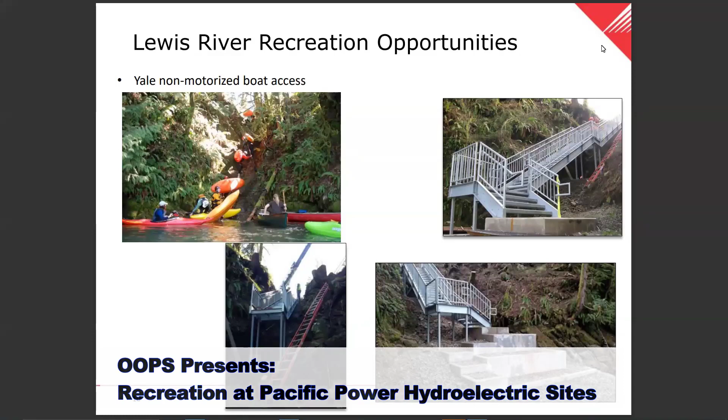One of the unique things on this staircase is that the handrail is below the top rail so that you can slide your boat either direction. So it was one of those things where I'm like, why are we doing it this way? Why do we need this? It's like, well, that's how they get the boats up. Smart and weird. Neat idea.

So yeah, that's right as you go up 503 and then turn on the other, I can't remember what road it is that goes down towards Amboy, right there by Yale Bridge, as soon as you cross over, it's on the south side. So that's a great access point to think about. And then next slide.

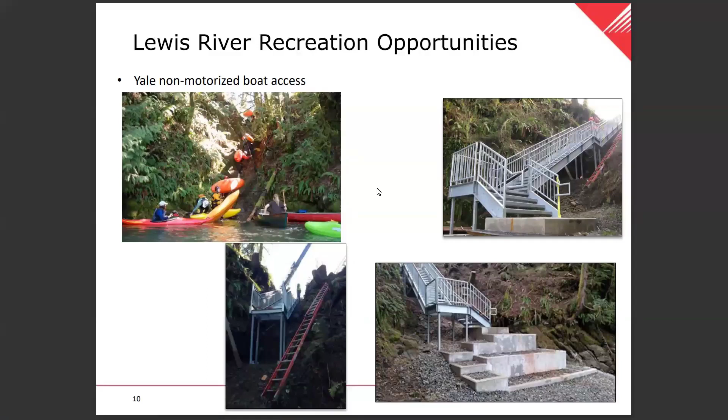Yeah, the other one, and you can access that same area by coming out of Cresap Bay campground down here, just kind of go around the corner, it's a little bit further paddle. The other is our Speelyai Bay Park. There's some area in there.

I was up kokanee fishing about a month ago, and I counted 4 open kayakers who were fishing, and they were trolling either with a little electric motor or by pedaling, and they were just out fishing this area right in here. And they actually, one of them did much better than I did. So I don't know if that helps or just the example of my poor fishing. Okay, next one.

This one is a little ways from you. This is over at our Cutler Hydroelectric project in Northeast Utah. So if you're ever out there traveling by Logan, if you're familiar with Logan, Utah, we have a very large reservoir over there. It's very shallow and there are a lot of associated wetlands with it.

And one of the things that we did working with Bridgerland Audubon and some of the other interest groups over there was to actually develop formal canoe trails through the wetlands. And so there are 3 different trails over there. I encourage you to check out Bridgerland Audubon's and just say wetland maze and it'll pop up and show you the trails there. So if you're traveling through and have an interest to go over there.

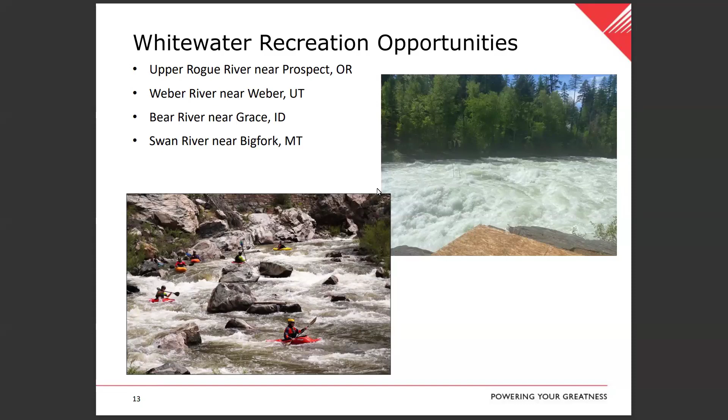Next. Okay, switching to fish and wildlife here. And this is going to be focused on the Lewis River. You saw this project before. So when Merwin Dam went in in the 1930s, that blocked all fish passage to the upper basin, blocked over 100 miles of habitat for salmon and steelhead.

And so at the time, they tried to kind of put a trap where they collect some salmon and put them over the dam, but there was really no way for those salmon to get out. So in the end, that was kind of a little bit of a failure, and I think it was just because technology wasn't there. And so we built fish hatcheries. So we've been operating fish hatcheries.

Well, when we recently went through our licensing back around 2004, there was a large interest to get fish passage to that upper basin. And so we agreed to do that. And so I'm just going to kind of show you how we do that right now. These are the species of interest. These are all listed under the Endangered Species Act.

For those of you who aren't familiar with bull trout, that's a resident fish. Pretty much stays in the reservoir. They will become anadromous every once in a while and go out. We sometimes see them go out as small smolts. We have yet to get any of them coming back, trying to get back up the river.

So we monitor that population, really focusing on establishing wild runs upstream of the project. That's our goal. Self-sustaining, naturally producing, harvestable fish. And we're making some good progress there. Next slide.

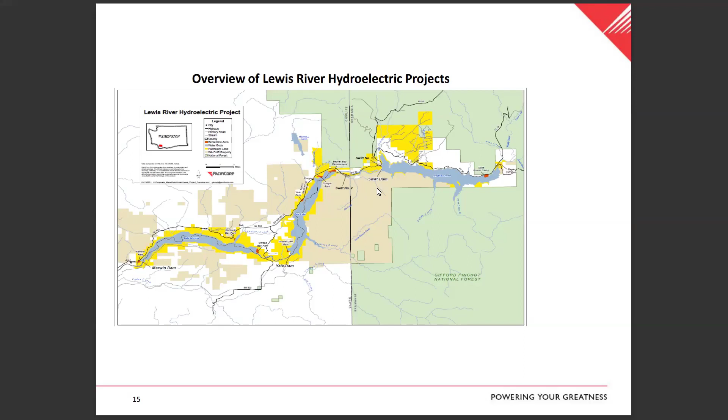So by opening up Merwin, I think we opened up about 6 miles of habitat and 18 miles of habitat with Yale. Okay, next slide.

So this is a picture of Merwin Dam and our fish facility, and I'll kind of talk you through how this works. So when fish come in, they can come all the way up to here. We have a little fish entrance over here and that goes into the trap. The fish swim in and they're elevated up to here with an elevator that runs every 15 minutes. They go down what I call the slip and slide over here into this big swimming pool where every morning my fish team shows up and we put them to sleep and we say, it's a hatchery fish.

It goes in this tank and goes to the hatchery, or this is a native fish, it goes upstream, or we do a lot of monitoring and evaluation. So we radio tag fish to see where they go in the upper watershed, how far they go. Are they dispersing or are they only using one area? There's all sorts of things like that we do. That facility operates year round.

Yes, sir. How do you separate the hatchery fish from the native fish? So almost all hatchery salmon have a little fin on their back called an adipose fin, and it's clipped off. So humans are sorting this? Yeah. So the biologists come in every morning, and they'll put them to sleep, and they come across the table, and they'll look at it, and they'll go, spring chinook hatchery female, and they'll go down a chute, and so we start to separate them.

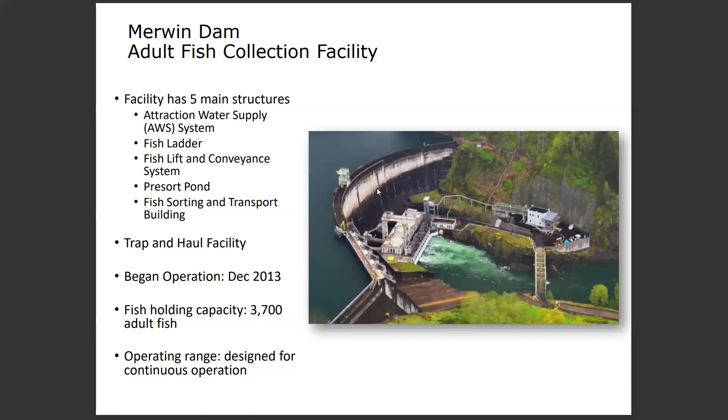All right, so that is our upstream facility where we're collecting and taking salmon upstream right now. Next slide. So those fish go upstream, they spawn, they have juveniles that come back out. Those juveniles want to get to the ocean. They have 3 big reservoirs that they've got to get through. How do you get them past that reservoir?

And so we've built this thing out here called a floating surface collector. Now, if you're a juvenile salmon and you're trying to get out to the ocean, you can't swim very well by yourself, so you're always going with the flow, right? And so you're kind of just going with the ride down the river. They hit the reservoir, there's no real flow, so they start swimming around. So what we're doing with this facility is it has a whole bunch of pumps on it, and we're pumping water trying to mimic an outflow of the lake.

Okay, so they come down, they hit the net, they kind of swim over by that entrance, and all of a sudden they're like, oh, there's some flow, I'm gonna go check this out. So they start to check it out, and then next thing they know it, the river inside here is going too fast, and they can't get out, and then they end up in a tank. And then we lift the tank up, put them on a truck, take them all the way down to Woodland, Washington, and let them go down there. So they get a ride upstream and a ride downstream.

And this facility operates pretty much year round. It can go up and down with the reservoir even during flood control. The only time we turn it off is basically for maintenance in July and August. Water quality gets really warm and we get like 5 fish a day. And it's like, no, this is very expensive to run. It was very expensive to build. And it's not good for the fish to be up there in that. They all go elsewhere, so we turn it off and do our maintenance.

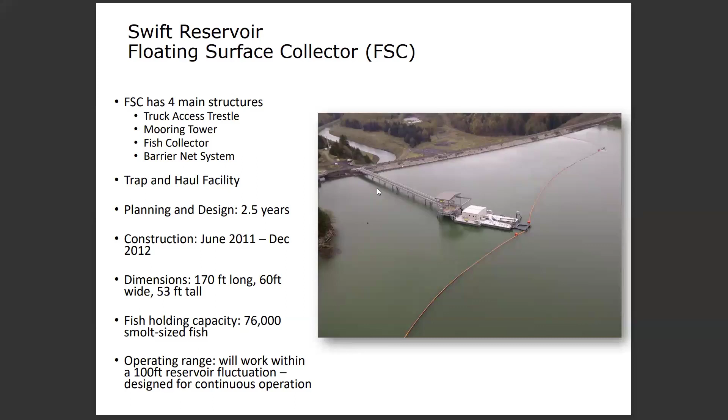Just real quick, our wildlife program. Love this program. I mentioned the bright yellow, about 15,000 acres. Almost all of that is managed for wildlife. We have a lot of elk up there. One of the neat things is that we recently, up above Swift, purchased about 4,000 acres. Unfortunately, it was timberlands, and you get really good deals on clear cuts, which allowed us, fortunately, to buy a lot of land up there, but it also gave us a blank canvas.

And so our wildlife team is able to go up there, do a little bit more, clean up the clear cut, not plant as a monoculture, right? To do different pockets of different types of trees. But one of the things up there is that over the years, the forest doesn't provide the forage and nutrient value to elk and other big game that it once did. Okay, and so we are actively putting in meadows so that the elk have places to go.

And so what's happening now is that we see a lot of elk, and this lower picture is a good one, that are coming into our meadows. All of this land, unless it's very close to our operations, is open for hunting. And so we now have a lot of people hunting on our lands because it's better hunting. Just because the elk are down there because the habitat's better. There's more nutrients.

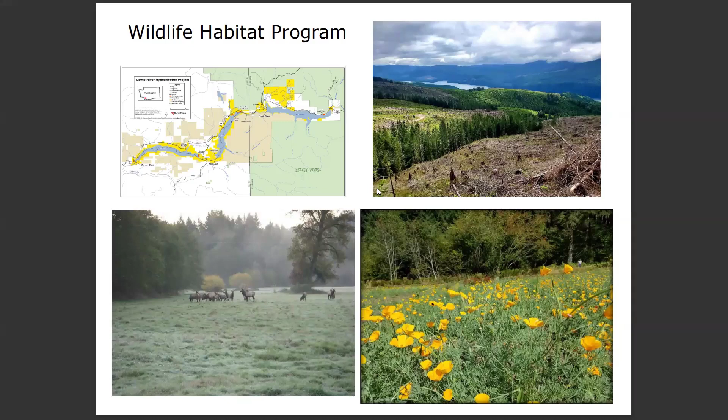They tried to put fish passage on it, a fish ladder, built it out of wood. It washed out the first year. Tried it again, washed out. They just couldn't get a fish ladder to go there. And so ended up doing mitigation through hatchery. So the habitat upstream of Condit was blocked, much as it was on the Lewis.

And so when we went in to get a new license to operate this project, one of the things that the federal government said was, you need to provide fish passage. And so we said, okay, let's look at a trap and haul system like we have up on the Lewis. And they said, in this case, no, you have to build a fish ladder. And you have to put in screens to bypass those fish. You can't do a trap. And after years of arguing, they have the authority to tell us that we have to do that.

And so we costed out what it would take to build a fish ladder that was essentially half a mile long along a steep canyon. If you've ever been on the White Salmon and rafted it, you know how that is down through there. And then to put in a screen, that was gonna cost 80, $90 million to do that. Okay, this is a project that only produces 14 megawatts. On average, across the year it produces 7 megawatts, which is essentially 2 windmills nowadays with the new technology, right?

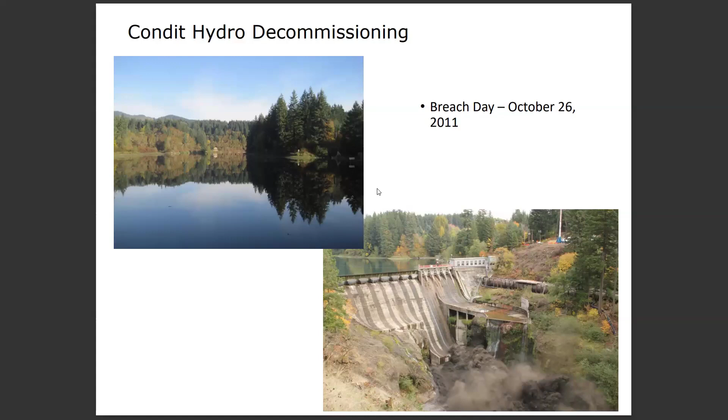A lot of that sediment sloughed off and went down through the 3 miles of lower river and landed in the Columbia. And so now you have a new delta off the White Salmon in the Columbia. One of the concerns down there was the shipping channel. You have all the barges going through, and it went right up to the shipping channel and essentially stopped. We had made the commitment that if it reached a certain depth of the shipping channel, we were going to have to go out and dredge it, but it never did. And so it's been monitored.

That is just sitting there. Every time the Columbia gets a high flow, the top layer peels off a little bit, but it's going to be there. The kiteboarders love it because now they come flying across and if they jump off the board, they're like this deep in water, so they have a little beachy, shallow area over there. That's what it looks like. Obviously, you don't want to leave it like that. So let's go to the next slide.

But first you have to take out the dam. So what we did was we had a contractor, J.R. Merritt, someone we were talking about, working with a local logging company and some other local folks just working on busting this thing apart. And so basically, they had huge hammers, just sit there and bust all day, bang, bang, bang, to break it down into rubble and then put it on dump trucks and haul it to the disposal site.

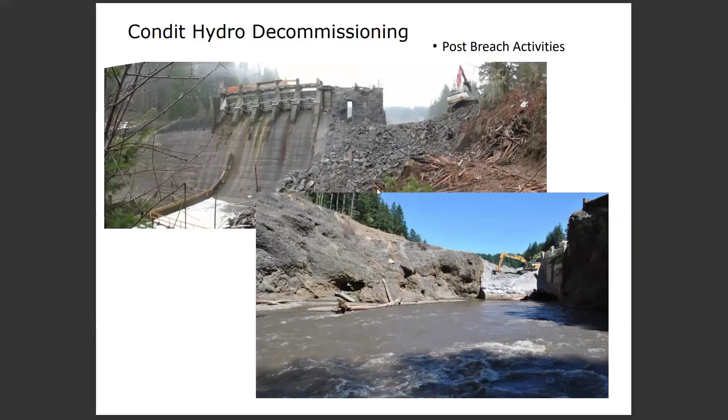We took the flow line down. Unfortunately, the flow line was all treated timber, so that had to be taken to landfill and couldn't be salvaged. We took all the stuff out of the powerhouse, the transformers and all the moving equipment, and basically mothballed the powerhouse down there. The building's still there, but it took them a year to basically get this down to where it is there. You can see the river going through here. Next slide. So this is what it looks like, I'm upstream now of the project, looking downstream.

And you go up there today and you look at that overlook, and unless you knew where the dam was, everything is growing back and you can't really even tell it's there. I've had the chance to float through there, a lot of the gravel, you're just getting back to form and function of that river, which is pretty neat to see.

From a fish standpoint, you've seen these fish spread out into areas above that, but you're not seeing increased population size. I'm not sure why that hasn't occurred yet, because you've opened up more habitat, but the numbers of fish returning seem to be somewhat stable. However, they've moved around and have better opportunity, I think. So it'll be interesting to see how that all goes.

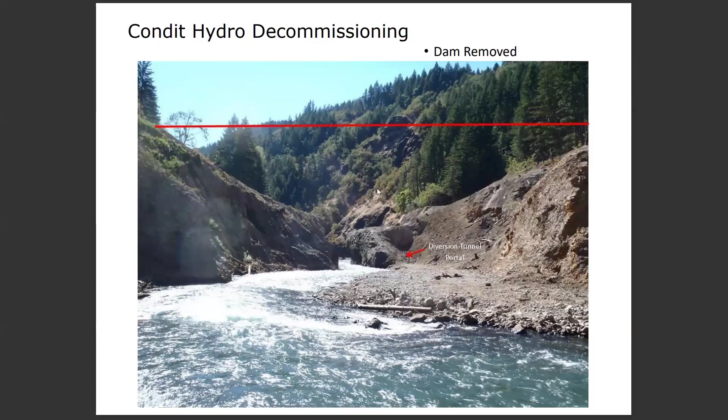Are the cabins still there? Most of the cabins are still there. So it was interesting. I had a lot of interaction with cabins. And at one point, a couple of them came up and said, okay, look, we understand this is gonna happen. Just don't leave us a mess. And it's like, okay, I appreciate that. And we're not gonna leave you a mess. In fact, we have an obligation to not leave you a mess. So the next slide. We have to restore the area.

And then it was all about public safety. If we can peel the slope back so no one walks up and the whole thing caves and goes in, you don't want that. So that was top priority. And then you didn't want to have erosive events when you have a heavy rain, right? This was like tearing off a Band-Aid, right? Let's do it all at once. Let's muck everything up, make a mess for 2 years, and then be done with it. And that's what we did, right? As opposed to, let's do a little bit and wait, let's do a little bit and wait.

And kind of interesting, if you followed the removal up on the Elwha, up on the Olympic Peninsula, that's how they chose to do it. It was a slow process. And then look at this where it was like rip the Band-Aid off. Got to the same spot, but this, I think, allowed the environment to just kind of restore on its own. We jump-started everything.

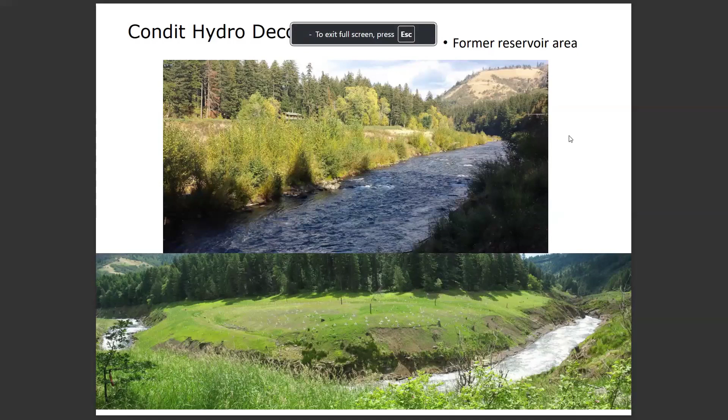This photo, the lower one, was taken like the first year. It doesn't look like that at all now. I was out there last fall. There's pine trees that are 15 foot high. That riparian area of willows, cottonwoods, it's just doing fabulous. So pretty neat to see how, just let it go, it'll do it.

And so back to the cabin owners. Some of them now, instead of docks, they had decks. Some of them kept, some of them didn't. A number of folks were like, they don't like it here anymore, and they sold out and moved on.

I gave a talk right before COVID, like in 2019 or something, back up there. They asked me to come up and talk a little bit to the local community. And I asked the question, how many of you were around when this happened? And only half the people raised their hand. A lot of people moved in. Of the people that lived there when this happened, I would say there's only about 40% of them that are still there. So there's been a pretty good turnover.

There were some cabins that were deemed unsafe because of the way the slope was. And so I think we bought out 3 cabins and had those demolished and removed. And then there was at least 2 or 3 other cabins where we went in and did quite a bit of foundation work to support them.

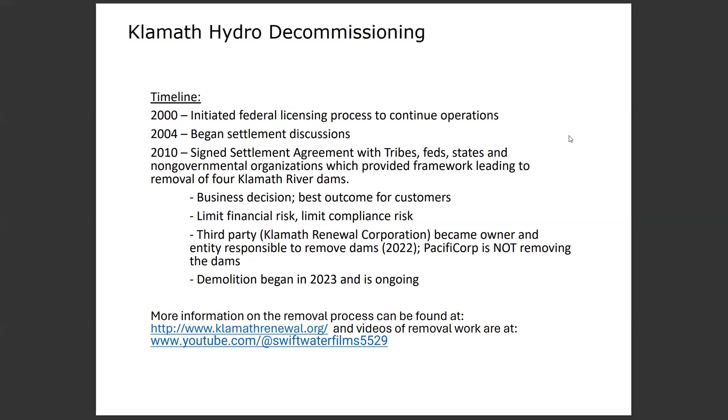So demolition began last year, is ongoing. If you have an interest, go look at the website. There's a lot of stuff on there, a lot of history and things like that. So the next few slides are just a couple of pictures that the Renewal Corporation showed. So this is J.C. Boyle. This is up in Oregon.

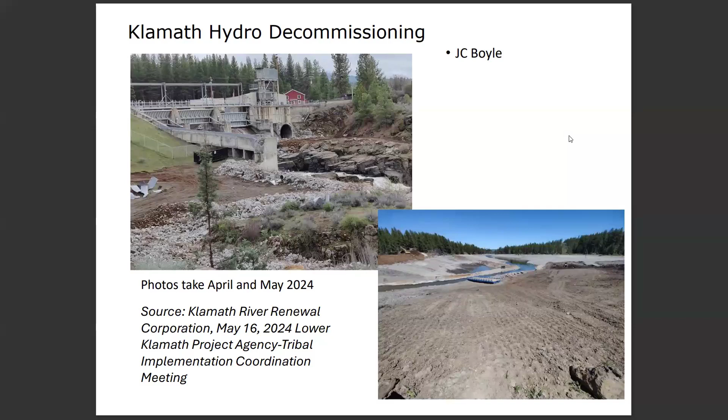It was a smaller dam, but it took advantage of a really steep drop, and that was an 80 megawatt project. That's being removed. So you can see here, they've started taking out the fish ladder. This was the flow line that went to the powerhouse. That's been taken out. The reservoir's been dewatered. They're already starting to resculpt the reservoir area. So that one's underway. Next one.

This is Copco 2. No, I'm sorry, this is Copco 1. This was much like Condit. This is much like Merwin Dam, kind of that big arch concrete in a canyon. And same way they did at Condit, just going out, beating on it, beat it to rubble and haul it off is essentially what they're doing. So that started, these photos are from earlier this month. You can see they're also starting to take the powerhouse apart.

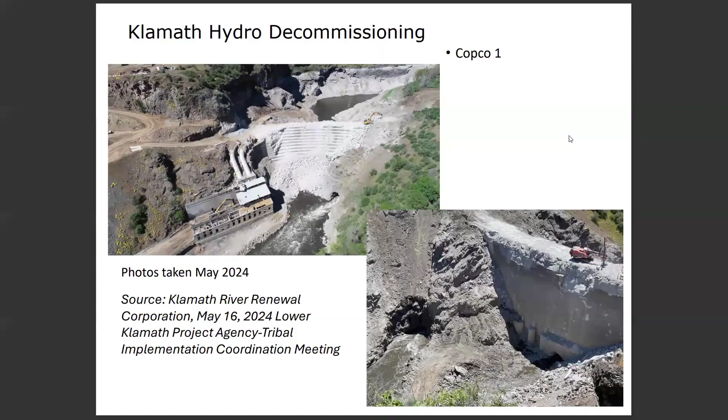Next slide. This is Iron Gate, it's kind of like Swift Dam, a big earthen dam. The top photo is before decommissioning. And then these two lower ones, you can see they're basically using an excavator, picking up the dam, putting it in dump trucks, hauling it off to the disposal site. And then that's what the reservoir looks like with the breach of that dam. That's the Klamath River flowing through it. You can see some of the grass seed and others starting to take place.

So it'll be interesting to see. Is that the same little mound on the bottom right as in the top picture? That mound in the background? Is that the same? Yes. Same one? Yeah, so that and that are the same. So that gives you kind of the view back, right? So this photo is probably not right on the dam, but kind of down in that area like that. So, yeah.

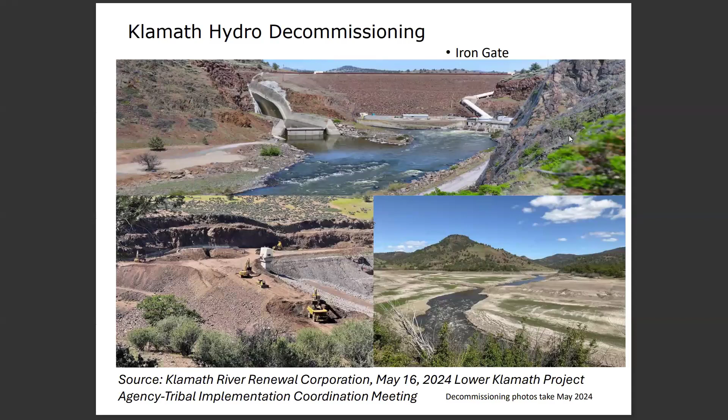Okay, we'll do the question. So back to your point, are we looking at new dams? We are not looking at new dams in the traditional sense like these right here, which dam a river and provide a reservoir or dam a river and divert flows into hydroelectric. What we are looking at is what we call open loop pump storage. And that is putting in another reservoir associated with the current reservoir, right? So you already have these big reservoirs in place. So let's build a new reservoir up here on the hillside.

And when we have surplus energy, all this solar coming out of California, let's pump water up, hold it, and then when there's a demand, you can release that water back into the reservoir. So a dam, yeah, you're gonna have to build a dam, you're gonna have to build a reservoir, right? And each project's gonna be different depending on the geology. Ideally you wanna find a spot where, hey, I can just build this little dam, there's already 3/4 of it built because of the natural topography. We're looking at those. To build a pump storage, it's a long lead time, right? You're talking 10 years to get to something like that.